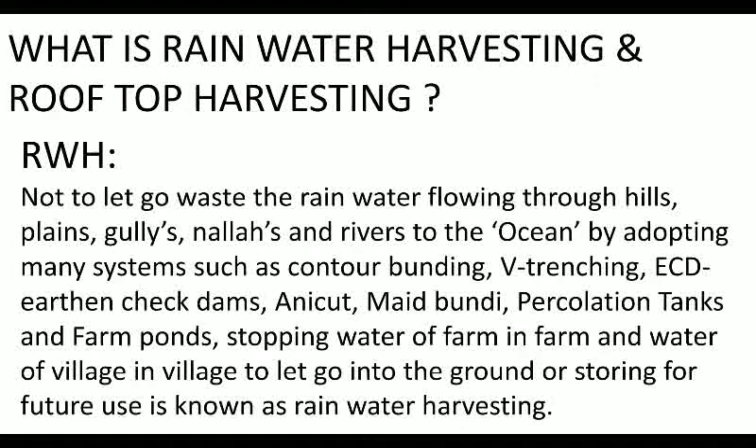Now, rooftop harvesting. Rooftop harvesting is taking the rooftop water and storing it for future use in a storage tank, and using the spill or surplus water to recharge the groundwater reservoir.

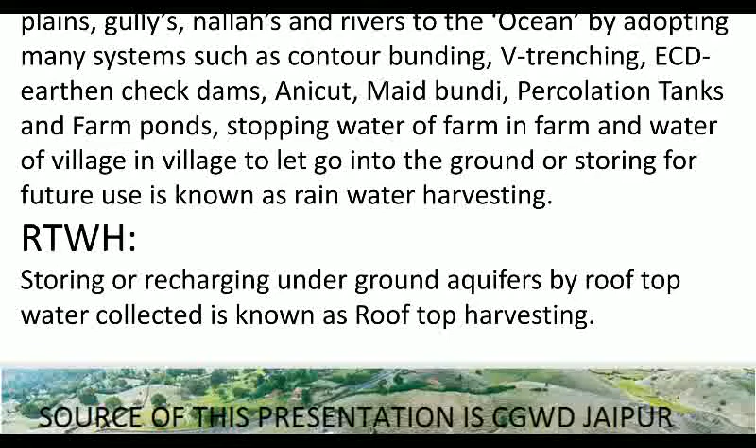The sources of this presentation are based on CGWD Jaipur and Mukhyamantri Jal Swavlamban Abhiyan, which was presented in Tier 2 training of Central Groundwater Department.

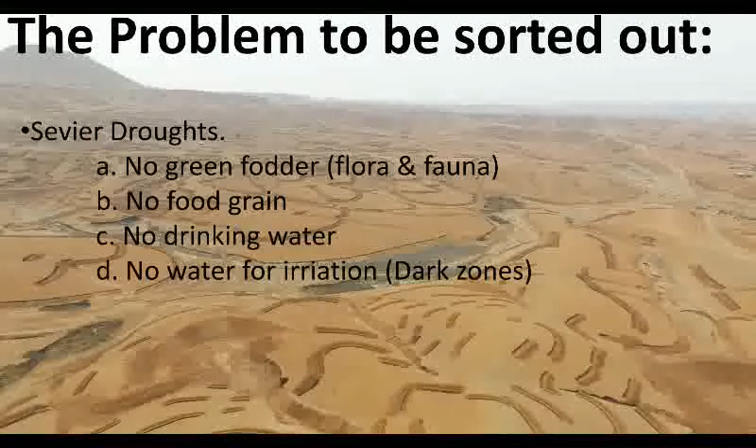Now, what's the problem? You can see in this picture the problem to be sorted out. This scene is common - a Rajasthan Registani scene. There's no grass, leaves, no vegetation, no greenery at all, and these are conditions of severe drought. No green fodder, no flora fauna, no food grain, no drinking water, and no water for irrigation - these are dark zones. Most of 80% of districts of Rajasthan are dark zones.

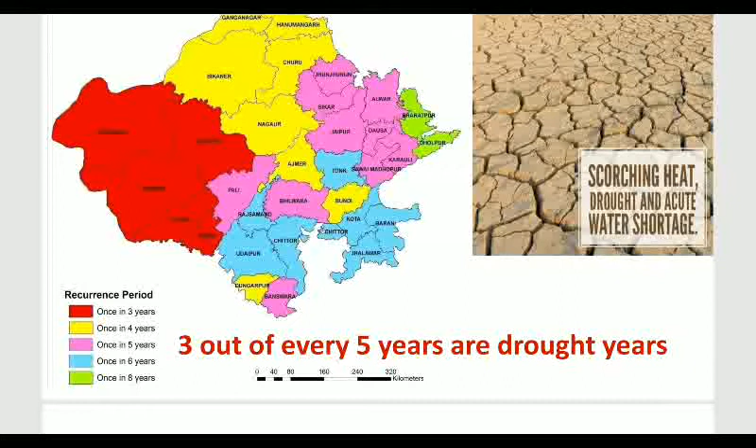You can see the high drought frequency in Rajasthan. In the red areas, there's a drought once every 3 years. In yellow areas, once every 4 years. In pink areas, once in 5 years, in sky blue once in 6 years, and in green, once in 8 years.

The only solution is rainwater harvesting, because no other source is there in Rajasthan. For solving this severe problem, only rainwater harvesting is the perfect solution.

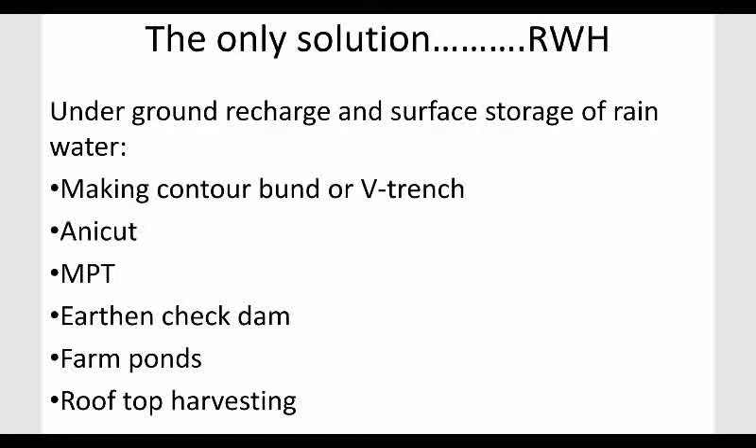In rainwater harvesting, we make small structures, both kacha and pakka type, in the area, and utilize the rainwater. First, we make contour bunds or V-trenches. At contour level, we make these contour lines, trenches or bunds, so that the water may stay there for a short while, the groundwater may recharge, and the moisture in soil may retain for a long time.

Then second is the Anicut. This is a structure used in more slopy or hilly areas where the water pocket is less, but because of more slope, most of the water runs downstream. This structure is most beneficial because earthen structures will not stay in these areas.

Then the next structure is MPT, mini percolation tanks. We may store water for a short while just for percolating or infiltrating it into the ground.

Earthen check dams - again, if there's a water pocket, we make an earthen check dam. Even for mini percolation tanks or major storage of water, these earthen check dams are prepared. The next structure is the farm pond.

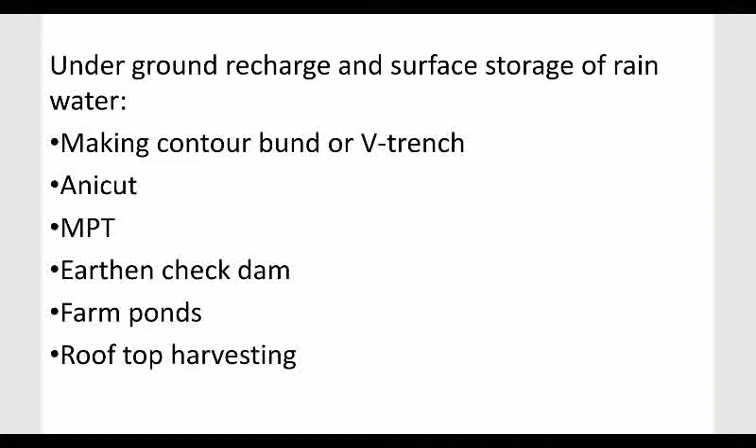The government of Rajasthan has passed an order that each and every house having a plot area of 500 square yards or more is required to make a rooftop harvesting structure. In this, we collect the rooftop water of the house, and first of all we store it as much as possible for future use, and then we let it go into the ground for recharging the underground reservoir so that the water may be utilized in future.

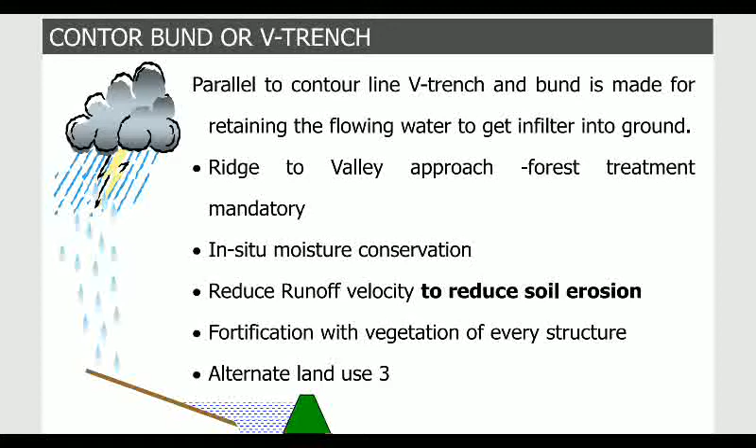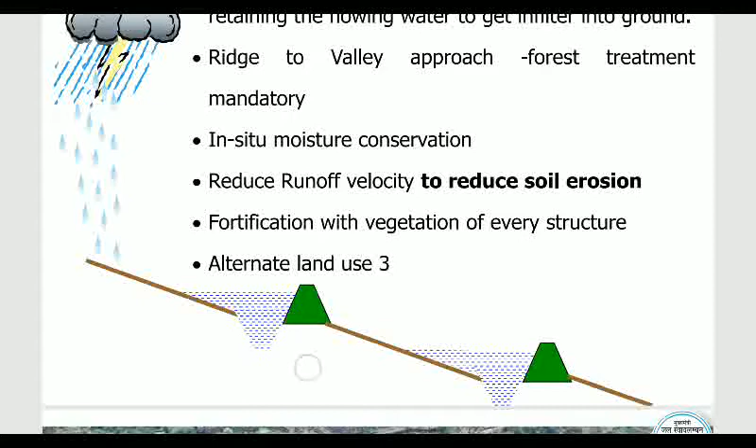So first of all, the first structure was contour bund. You can see this is the contour bund, and this is stopping the water on the upstream side for a short while, and the water will percolate into the ground and the ground will be recharged, so that moisture in soil will increase, soil erosion will reduce, and the green cover will increase.

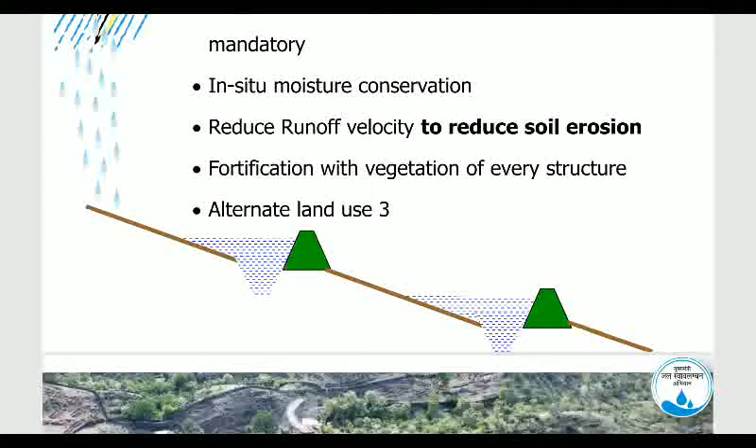You can see in this picture, with mechanical means these contour trenches are prepared, and for a short while the water will stay in these trenches, and many seeds may grow, green cover will increase, moisture in soil will increase, and ultimately our purpose will be solved, that water will percolate into the ground and the green cover will be increased.

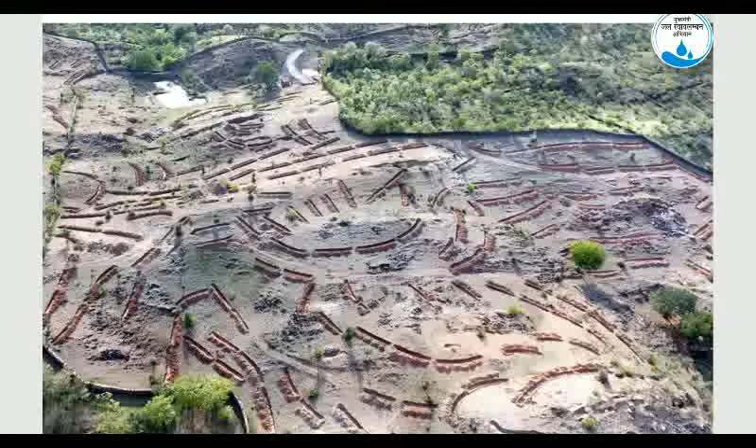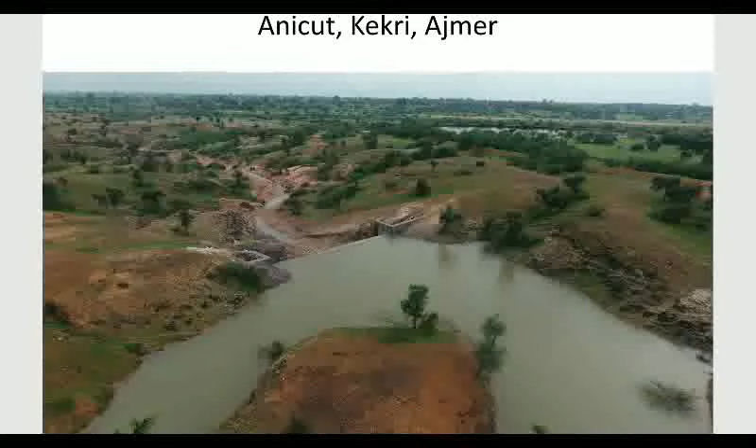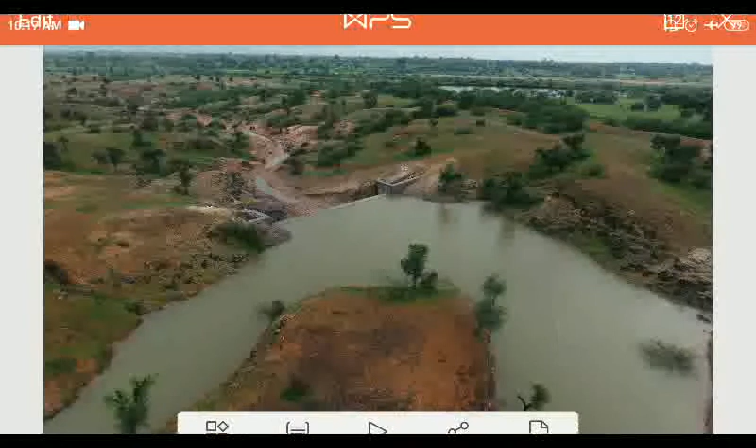Now the next structure was Anicut, and this Anicut is in Kekri, Ajmer. You can see the water pocket on the upstream side, the water is stored here, but this amount is very less. But it doesn't matter, because this water will stay here for a short while, but it will recharge the groundwater, and the green cover will increase due to the moisture in soil, and this will level the surface, because the soil silting will be there, and on the upstream side of the Anicut there will be silting, and the ground may become plain, and we can utilize it for agriculture also.

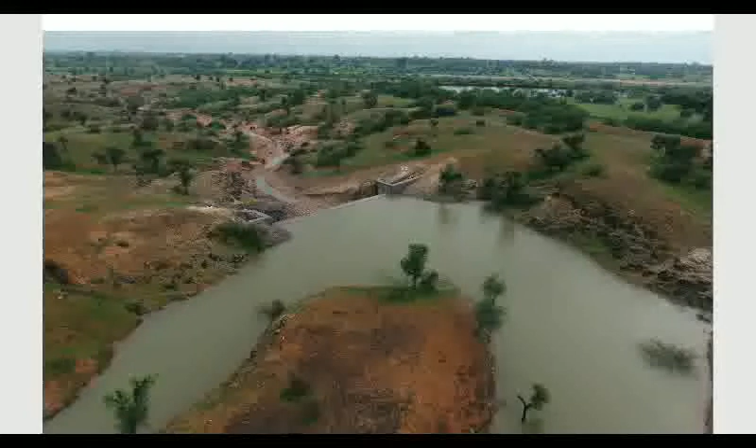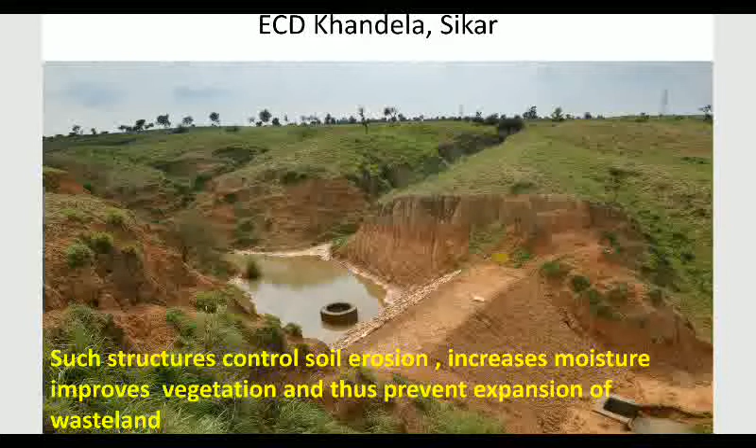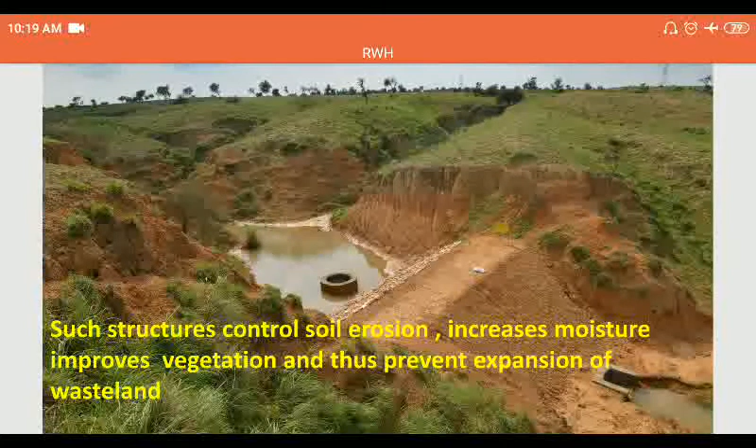Now you can see ECD, earthen check dam, which is in Khandela, Sikar. Here you are looking at this structure, this and this. This is a tunnel through the earthen check dam for safeguarding this check dam, because if more water comes or more rainfall occurs, then the water will overtop this earthen check dam and break it. So for the safety of this earthen check dam, we have utilized this structure.

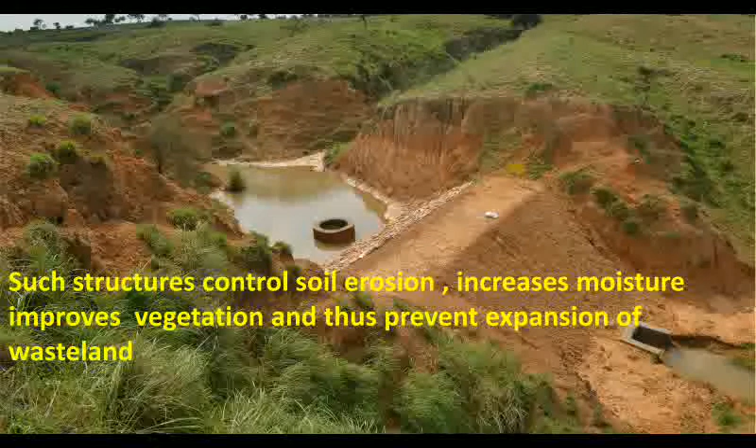This is a spillway. The water above this structure will go inside and safely flow down to the downstream side without failing the structure. The storage of water will definitely recharge the underground water, and the moisture in soil will retain for a long time, and definitely it will increase the green cover and vegetation.

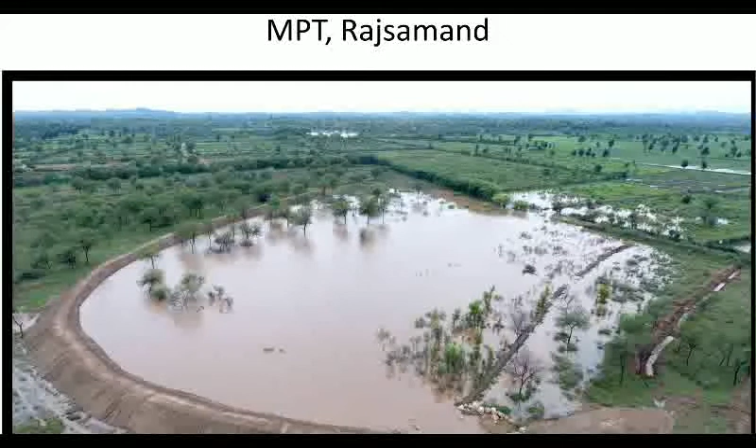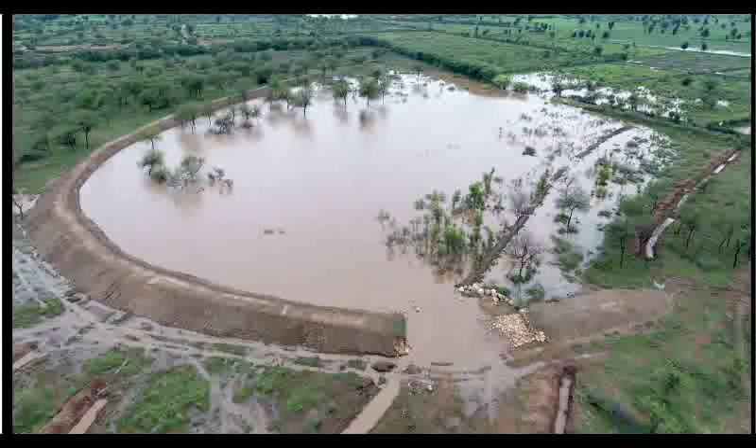Now look at this MPT, mini percolation tank. It is in Rajsamand district, and you are looking at the earthen check dam, which is storing some water here. Definitely some water will percolate or infiltrate into the ground, increasing the underground water, and this is the spillway safely flowing the excess water without breaking the earthen check dam, and the structure will be safe due to this spillway.

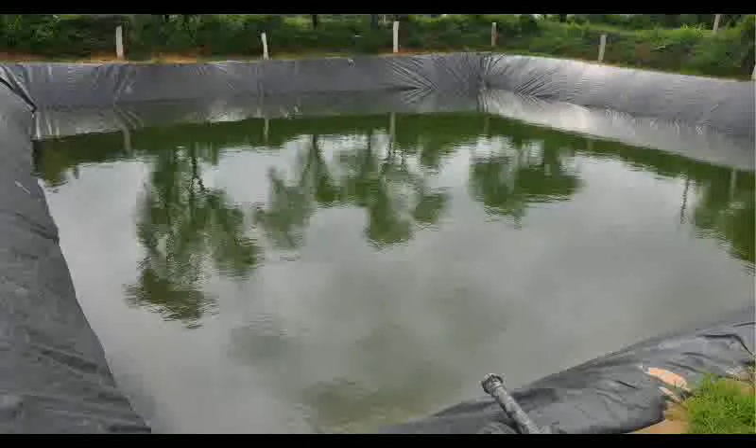Now the next structure is farm pond. This is prepared by a farmer in his farm in Makrana, Nagaur. This is the farm pond in a plain area farm. The water inlet is there. You can look here, this is the water inlet. Water from the upstream side, or collectively, is coming to this farm pond, and you can see this black color. This is polyfilm, or the impervious cover, so that the water should retain for a long time in this farm pond.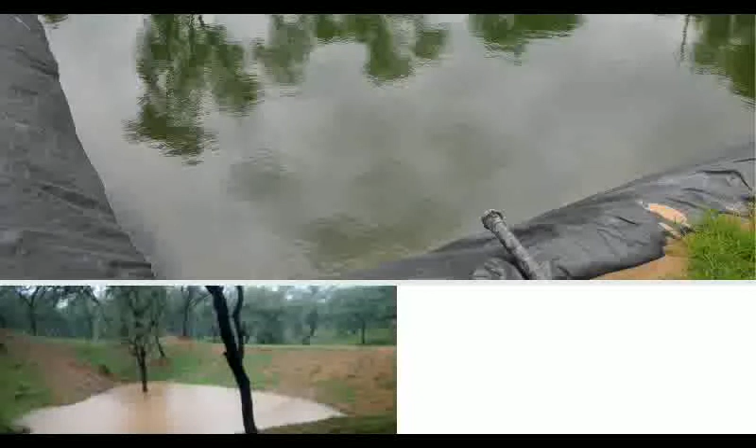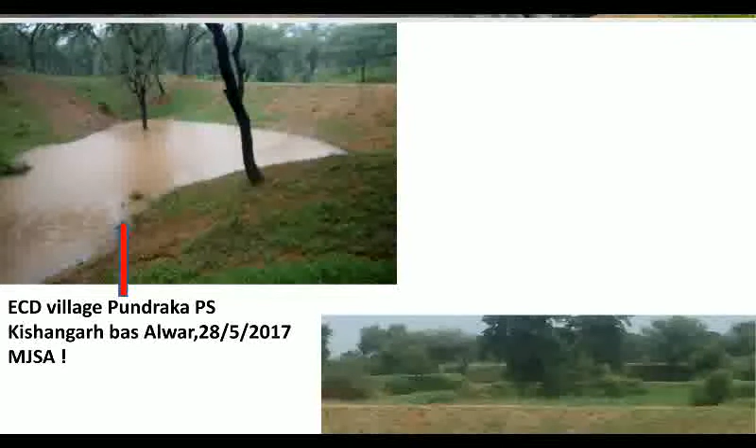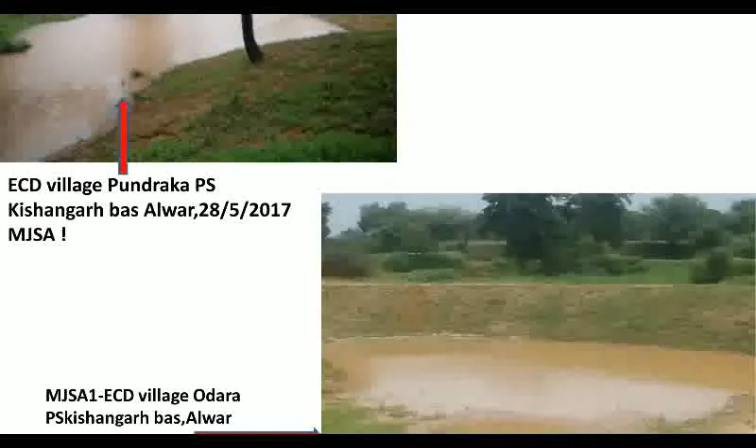So this water may be utilized in the required period or required time for irrigation purposes. These are in Pundraka, Panchayat Samiti Kishangarh, Alwar, and this is also village Odara, Panchayat Samiti Kishangarh, Alwar. These are earthen check dams, and you can see the water storage in these, and ultimately this water will go inside the ground surface and increase the water in underground reservoirs, and definitely the flora and fauna will increase and the green cover will increase, benefiting our environment.

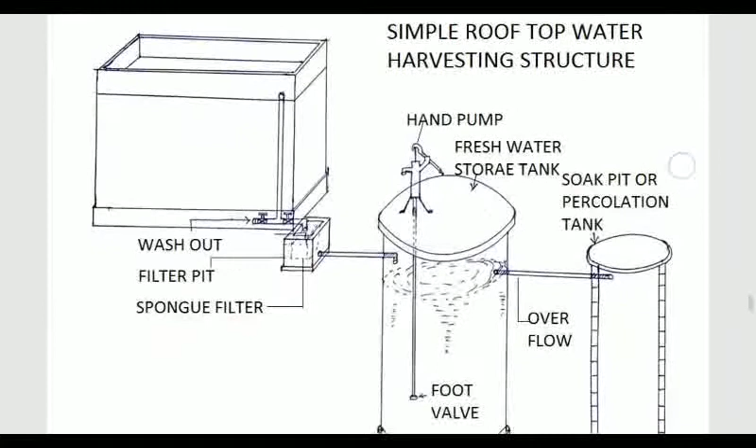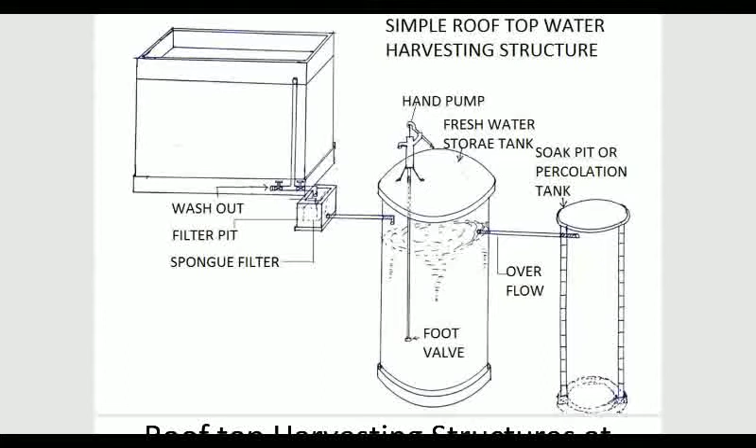Now let's come to the rooftop water harvesting. You can look here - this is a very simple rooftop water harvesting system. You can see this is the rooftop, and this is water. This is a pipe through which the water is coming to this point.

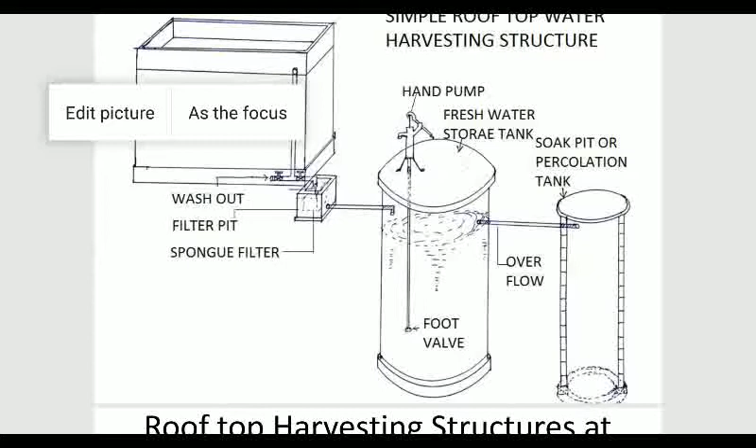Here we have provided a washout, and another inlet to the filter. While the first rain is coming, we open this washout valve and close this inlet water valve, so that the dirt and other waste materials go outside, and only when clean water is there, we close this and open this valve.

The clean water will go to the filter. This is the filter pit, and this is a sponge filter. We have provided a sponge sheet inside this filter, and the water passing through the sponge becomes clear water.

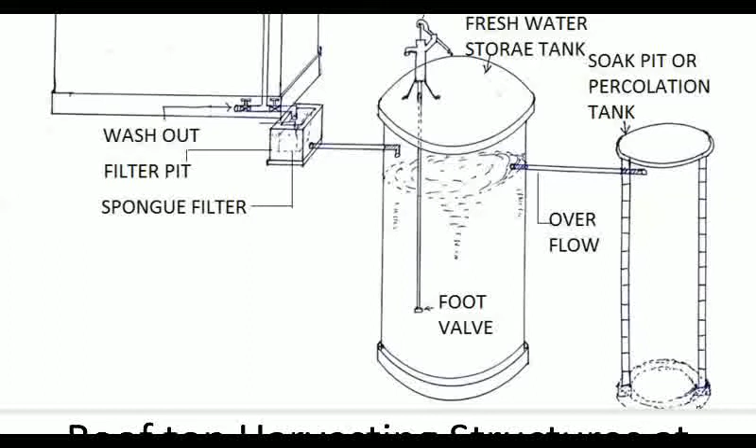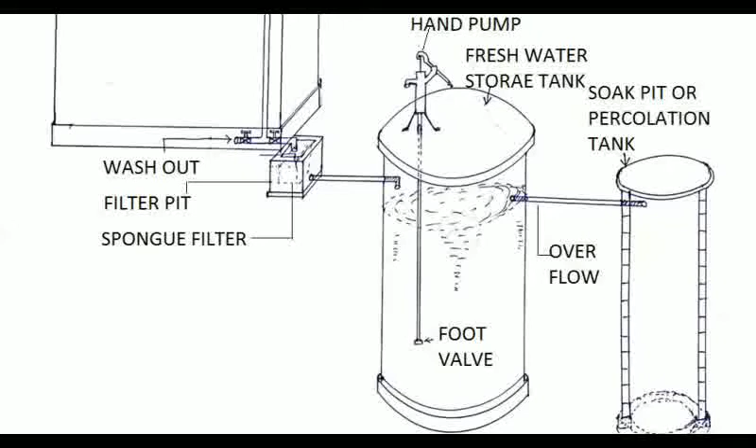This clear water will go to the storage tank, and you can see a hand pump fitted in this tank. You can utilize the water of this storage tank. Here you can see an overflow pipe, connected to this recharging pit or soak pit or percolation tank. So excess water goes into this percolation tank or recharge pit, seeping into the ground and increasing the underground reservoir level.

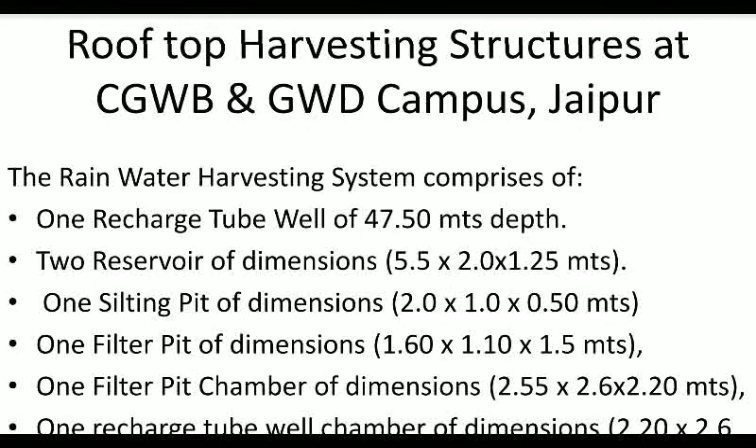Now we are taking a live example of a rooftop harvesting structure at CGWB and GWD campus Jaipur, located in Jhalana institutional area, Jaipur. These are the dimensions of that water harvesting system.

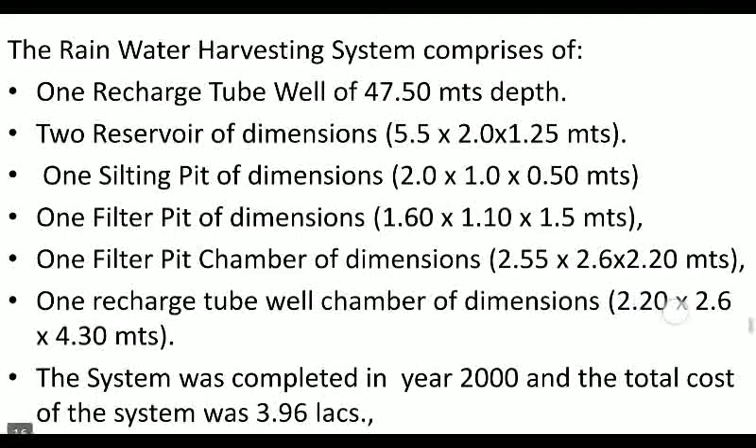You can see one recharge tube well of 47.5 meter depth, two reservoirs of dimension 5.5 by 2 by 1.25 meters, one silting pit for deposition of dirt, one filter pit of dimension 1.6 by 1.1 by 1.5 meters, one filter pit chamber of this dimension, and one recharge tube well chamber of dimension 2.2 by 2.6 by 4.3 meters, because we have made a soil filter there.

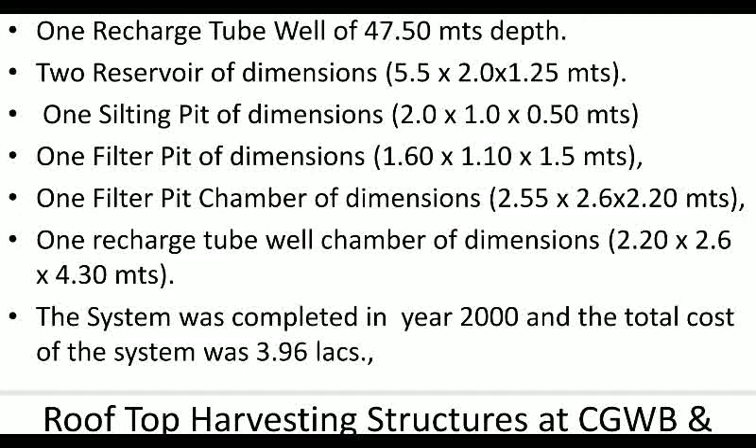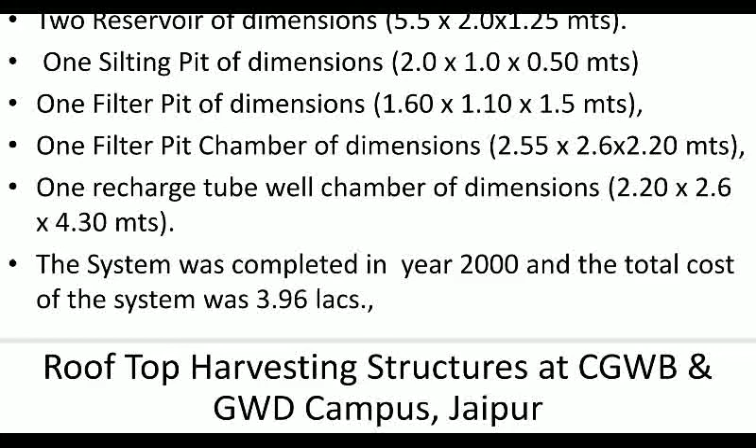The system was completed in the year 2000, and the total cost of the system was 3.96 lakhs. So you can see the drawings of the system.

This is the earlier drain which was provided, and this lower one is the new drain prepared for this groundwater rooftop water recharging system.

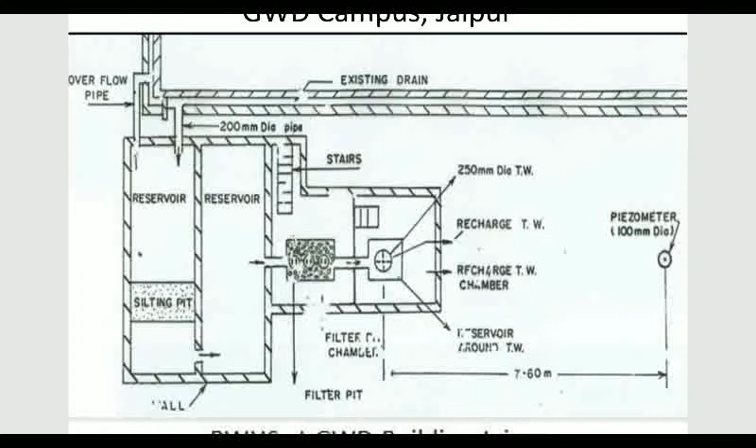This drain lets the water into the first tank, which is the settling tank. Then the water comes to the second reservoir, which is more settled, clean and clear. Then it goes to the filter, then to the recharge tube well, where again we have made a soil filter, and the clear water goes inside the tube well.

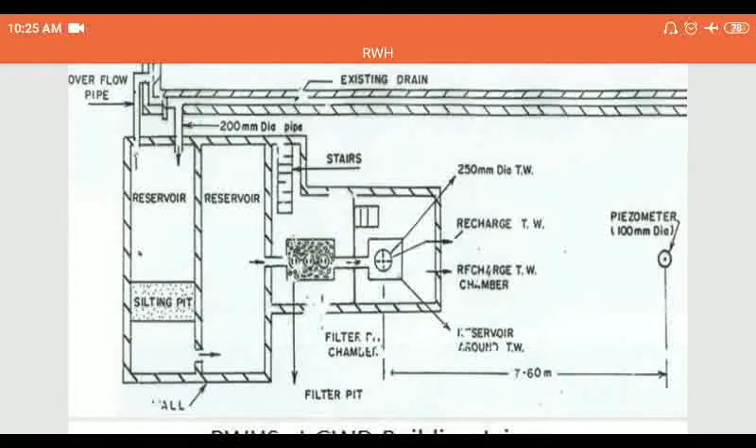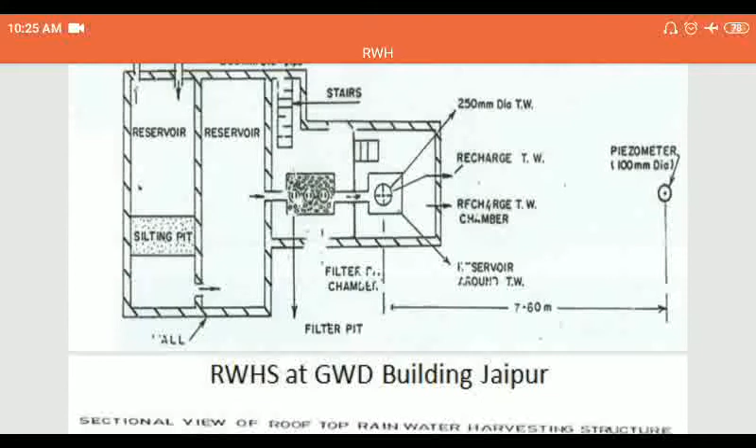This is a piezometric well here, used just for study or survey of whether the underground reservoir water level has increased or decreased. This is the typical drawing, and you can see the cross section that was planned.

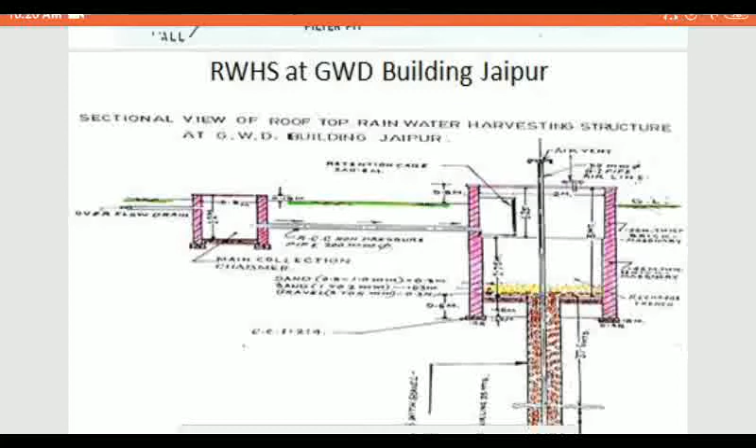After the filter pit, the clear water goes into the recharge well. Here you can see the soil filter, and this is the recharge well. This tube is inserted in the recharge well just for escaping air from the tube well.

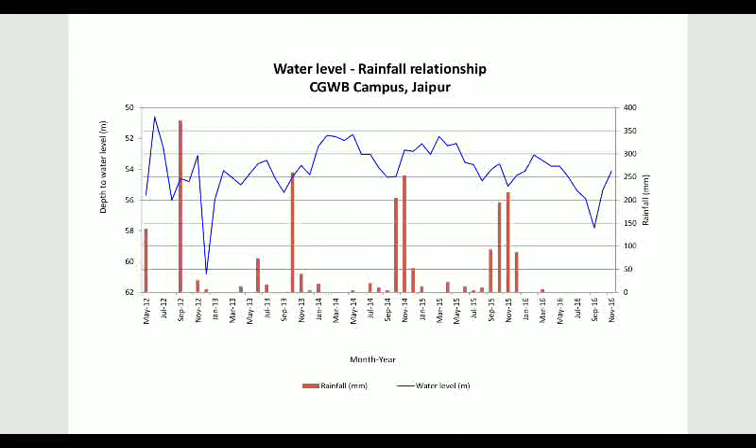This is a graph prepared based on daily reports. This is the date-wise time axis, and this is the water level plotted. You can see the graph - the water level increases or decreases according to when rainfall occurs.

These are the salient features of the RWHS at GWD Jaipur, including these prepared tanks. The total runoff area is 1050 square meters, with total runoff of 26.77 cubic meters per hour. For this much discharge, this is an appropriate structure that can absorb it.

The total cost of the water recharged, or unit cost of water recharge, comes out to be 3.4 paisa per liter.

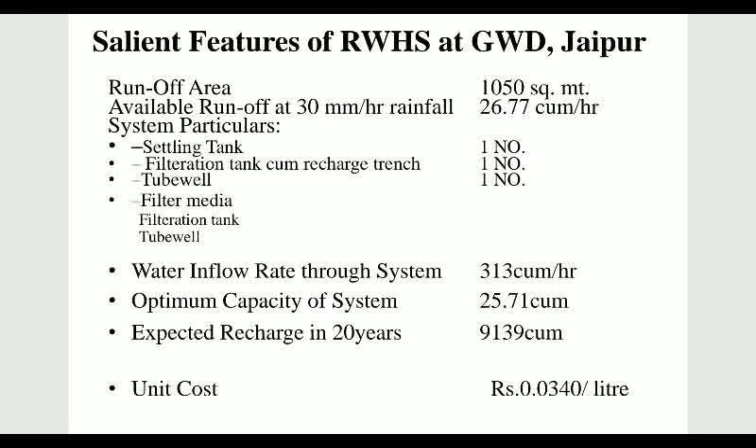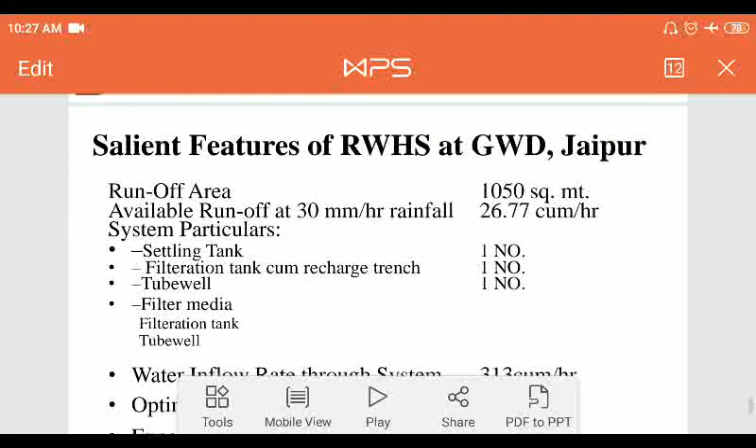So my presentation is completed, and this is all about rooftop harvesting and rainwater harvesting structures. If you have any questions or queries, you may ask me personally. Thank you.